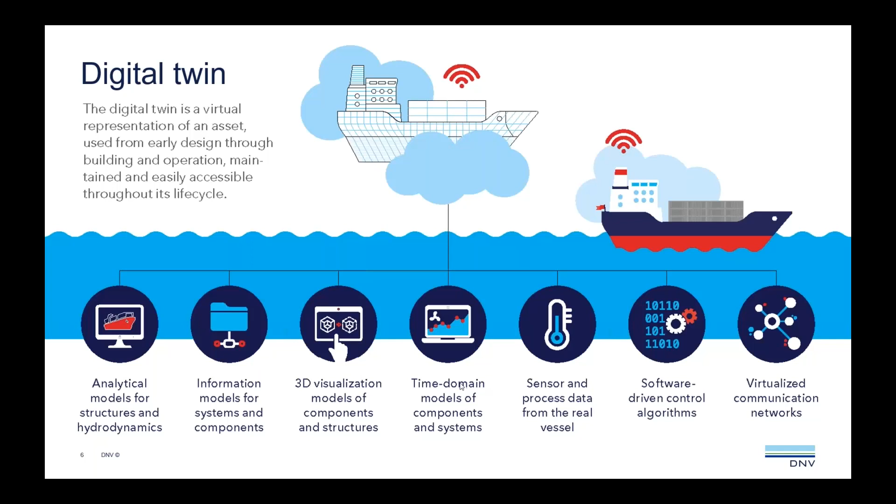So why do we do this? Typically, if you can work in a digital environment early on, there is very little risk because there is no risk of damaging hardware and components. You can do a lot of changes quickly and test them and find, for example, that your vessel is not suitable for a certain operation, etc. And if you want to do more testing in the real vessel, this is very expensive and also more risky, right? Because if you find something later in the project process, it can be very expensive. So, okay.

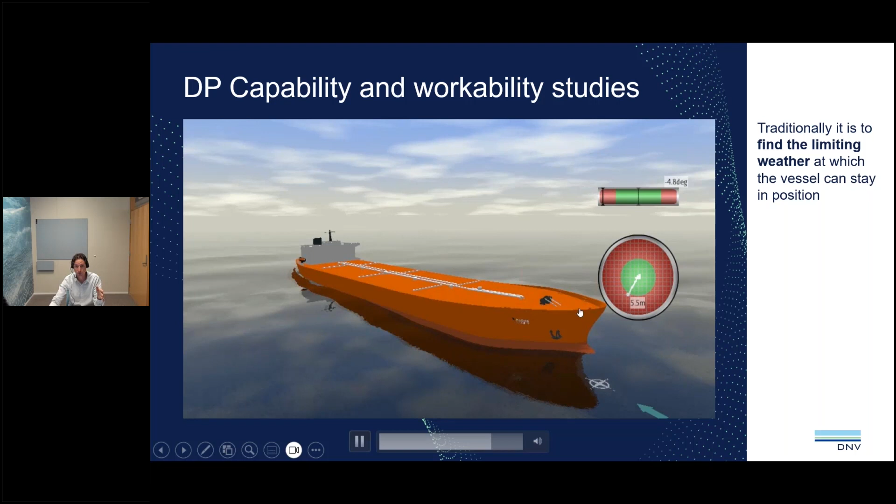Now we are increasing the weather. We see that the vessel is still able to maintain its position in about 5.5 meters, but the weather is increasing, and you see the vessel is slowly losing position, and the heading also is hard to control. So eventually the vessel will lose position, and in this case we would say this operating condition, this weather, is too harsh for this vessel to operate. This is one of the typical applications.

Lately we've been moving more into workability. For example, you see an example here. The idea is you want to assess if you're able to transfer people via motion compensated gangway from, for example, an SOV to a fixed oil platform or a wind turbine. And in these cases, we are looking not only into the limiting weather conditions, but for example, how many days, how many hours during the month you can transfer people from the SOV to the platform.

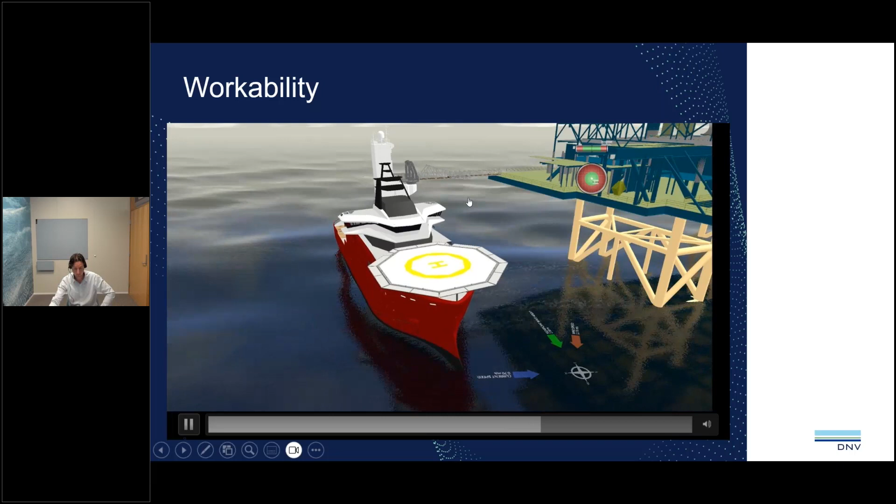There are different ways of running this type of analysis of workability and limiting weather conditions. The two main families of analysis are called static and dynamic simulations. In a static analysis, you get the weather forces: wind, current, and waves. We increase the wind, current, and waves, and in the static case, you fight back with the thrusters. And when you reach the point where you don't have any more thrust, you stop there, and that's your limit.

So in the static simulation or analysis, there is no vessel motion. It's just a pure balance between the forces, the environment against the thrusters. We know that in reality there will be dynamics, because the vessel will move, right? So we use something called dynamic allowance, a buffer to say we need to reserve some thrust for dynamics, or increase the dynamic forces in the analysis, to account for those dynamics which are there in reality but not accounted for in the static analysis.

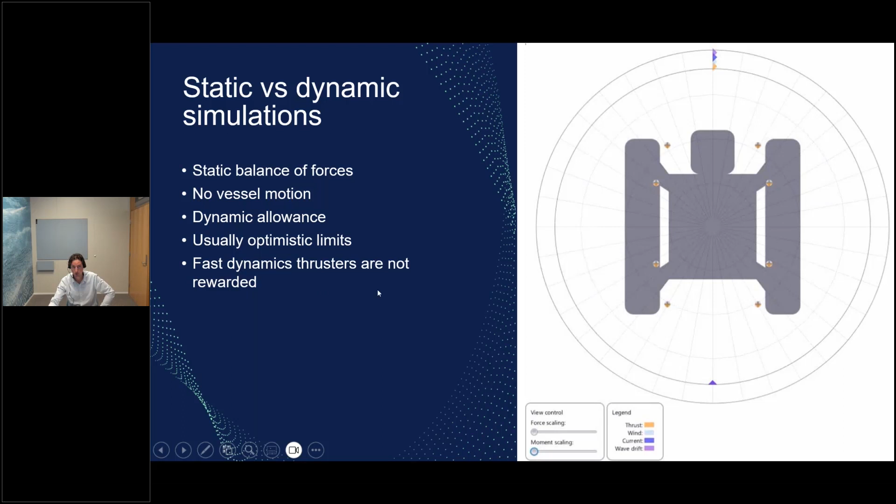Another important thing to point out is that if you have, for example, fast thrusters, you're able to deliver the power quicker than in another case. You're not really rewarded here because there are no moving parts. There is no dynamics of thrusters or generators. So you don't gain anything when you run the static analysis if you have faster thrusters, for example.

When you run dynamic simulation, the difference is that we are not really looking at balancing forces. We are mainly looking into the vessel position and trying to control it to what we call the set point, the place where you want to be. In this case, we consider the full vessel motion, both due to the first order waves and the dynamic positioning. And you get a bit more insight into the vessel performance, because you can also add, for example, the gangway motion, the crane motions, etc.

So the two main differences are that in the static case the vessel doesn't move, and in the dynamic analysis you can consider the full motion of the vessel.

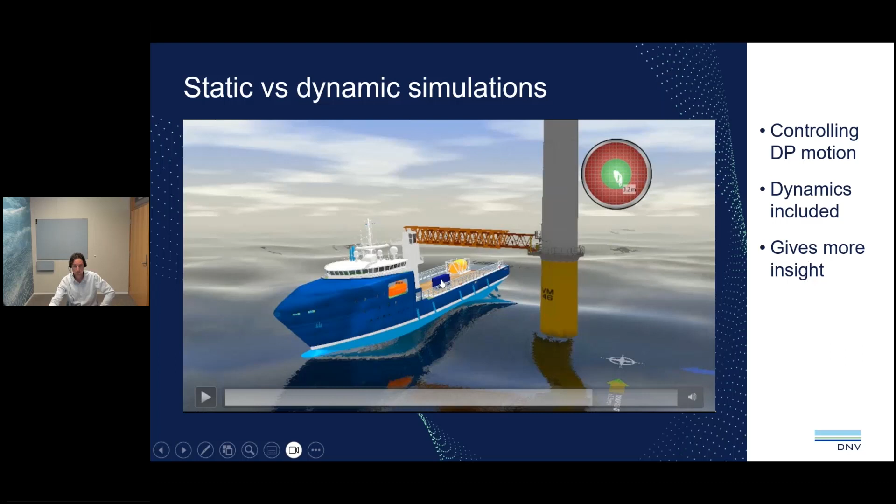When we run these simulations, we typically use our standard DNV ST-0111, which is the standard for assessing dynamic positioning capability. To make a long story short, the standard has different levels: 3 levels for static, level 1, level 2, and level 2 site, and 2 levels for dynamics, called level 3 and level 3 site. The slides will be distributed.

You can read the text later, but the main difference is that level 1 is a very simple method. It's mainly for monohull vessels, and it is prescriptive, meaning there are formulas for everything. So anyone that does a level 1 should get the same results, because it's just punching in the data, and the formulas and coefficients are the same for everyone. Then if you want to use your vessel specific data for the thrusters, the wave coefficients, etc., you can use level 2.

And then you can use level 2 site if you want to use site environmental conditions, because level 1 and level 2 use a Beaufort environment scale. So it's mainly for benchmarking. While if you want to run capability for the place where you're going to operate, then you do the level 2 site, which is the one that we use the most, together with the level 3 site.

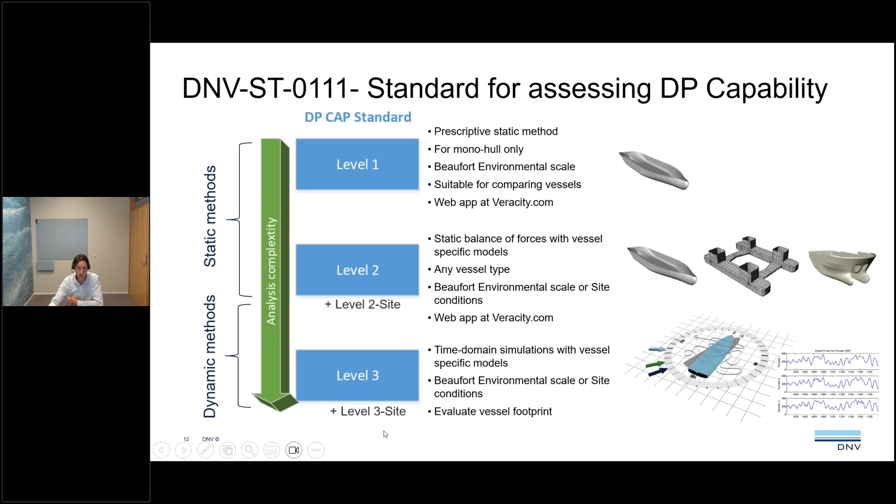If you want to look into dynamic simulations, where you look at the footprint, you look at the time series of power, how the power is distributed, etc., then you go to the level 3 and the level 3 site. Again, level 3 is mainly for benchmarking, while level 3 site is more for your site conditions, so your environmental conditions in the area where you want to work. And based on experience, level 2 site and level 3 site are the analyses that we run the most.

How is the standard used in industry? There are many energy companies that require the use of our standard for tenders and operational planning, among others, TotalEnergies, Equinor, Ørsted. It's also used in the shuttle tanker guideline in the North Sea. It's called NOROG 140, where our standard is required, and also the use of the web tool that we provide with the standards.

I will go back on this later, but the main idea here is that in the tool we have a share function where you can share the vessels between different actors, such that the vessel can be created as a design, a new build, and then can be transferred. So reuse of the vessel models through the vessel life cycle. So it can be transferred from the designer to the yards, to the owners, etc.

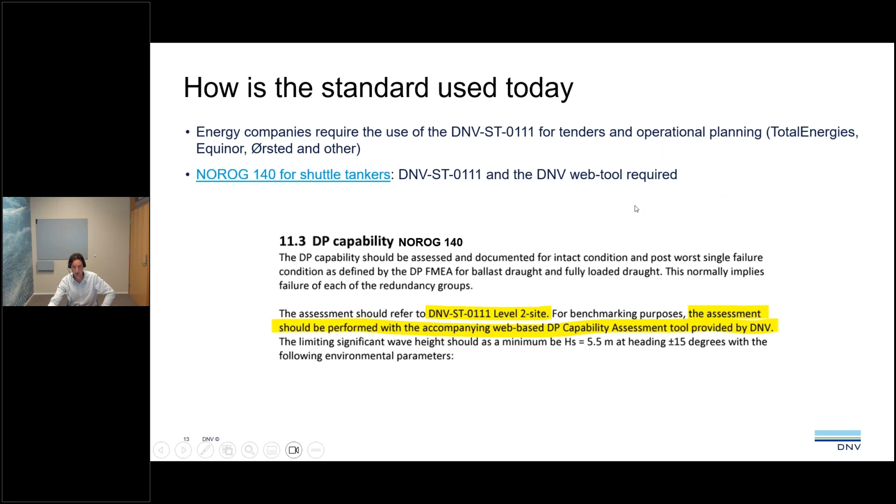So where do we use the digital twin? There are different areas where we do that. For design, for example, it's a lot about right sizing these days, right? 20 years ago, we were building a lot of platform supply vessels in the North Sea with giant engines. These days, it's more like finding the sweet spot, balancing performance and cost. So we work a lot on thruster layout, rating, power systems, configurations, redundancy design, etc., just to find the right vessel configuration.

It is used a lot in operational planning, so you can run simulations and find out what is the operational window, what is the limiting weather the vessel can operate in for different configurations. And of course, contingency is also part of it, and is very important. For example, if you have one generator out for maintenance, a thruster out for maintenance, if you lose part of your equipment, etc. Or we have had some cases where we did some simulation because, due to vibration, a tunnel thruster could only work up to 80% of its power, right? So there are cases like that where you have reduced power or reduced functionalities of your equipment, so you can run this and find what are the new limiting conditions for the operations.

And these are used typically as input to operational guidelines, like activity specific operational guidelines, or well specific operating guidelines for drilling. We've been using this for positioning strategy. For example, I have some examples later of how to optimally place the heading of your vessel towards the waves, towards the current. And sometimes we run what we call workability, operability, where you try to estimate, for example, how many days a month you can operate in different areas.

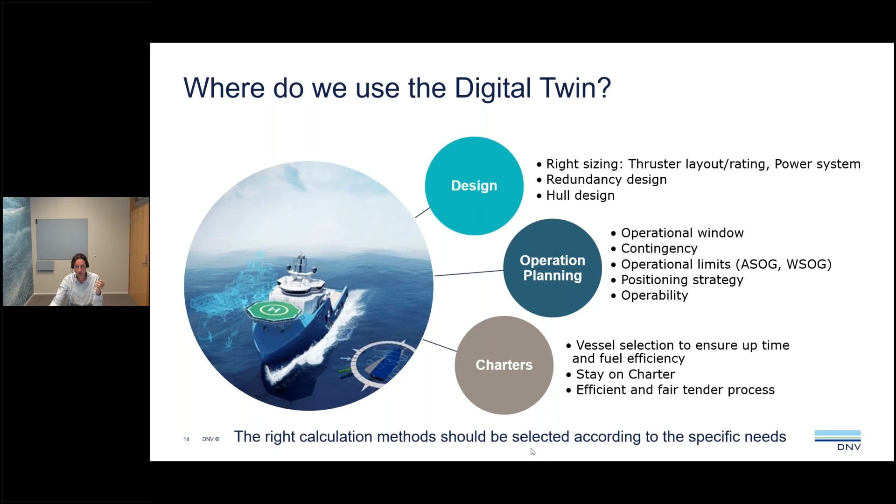So the benefit of using DNV and the digital twin and the DP capability study that we perform here is different. First, we can help operators and vessel owners to choose the right vessel. The idea is you want to have a certain uptime, right, or reduce the non-productive time. And as I mentioned before, you don't need to get the best vessel out there. You just get the right vessel. Maybe you get not the best, but some vessel that can work and maybe is cheaper to run, because we know that overpowered vessels are very expensive. But at the same time, if you don't pick the right vessel, you pick a vessel that doesn't have enough power, enough capability, then you end up waiting on weather, and that is also costly.

We help our customers reduce time for tenders by providing comparable bids using the standards and our tools. We can help the operators choose the right configuration, see what the different configurations and power configurations give in terms of fuel consumption and emissions to reduce operating cost. We help vessel owners select the right vessel and check if they fulfill contract requirements. And then we work a lot on operational planning to understand the limiting conditions to reduce the risk of incidents and accidents. And of course, we are a third-party organization, so we don't have any interest in different things. So we provide our third-party judgment on this.

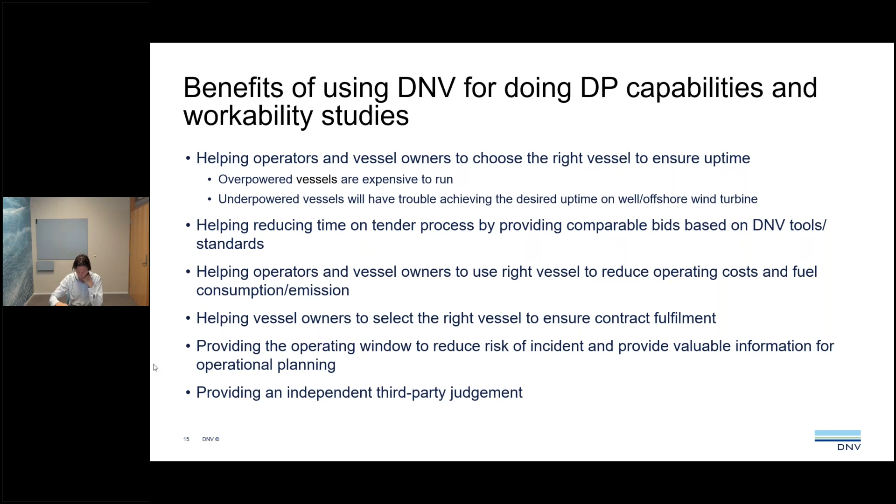Thanks, Luca. So now we're calling on you to offer your insights into what you're thinking about the digital twin technology. So we're asking what you consider the biggest benefit of a digital twin. So if you can click on one of the options there: if it's best as a tool for right-sizing vessel design, a tool for selecting the right vessel for different operations, best for giving insight into vessels' operating limits in terms of the weather conditions, or to support environmental sustainability. So you can click directly there into the poll. We'll give you about a minute or so to click, and then we'll have a look at the results.

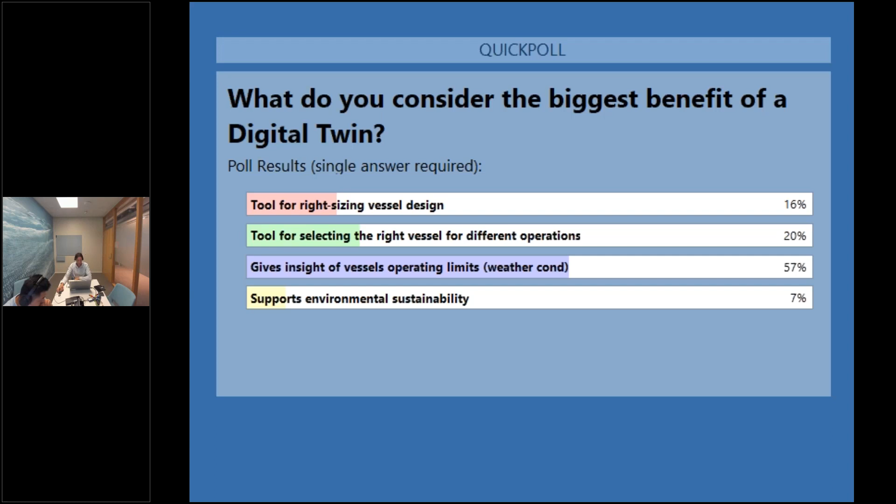Okay, thank you. All right, let me go back to the presentation. So one of the cases that I would like to present here is walk to work and the application of transferring people via a motion compensated gangway. The idea here is that we want to try to maximize workability, right? So we want to be able to transfer people when you have to and when you need it. The simulation that we run is for predicting if you can send people on the gangway.

And the way we do it, we model the vessel, we model the gangway with gangway-specific limits, and we can run simulation on different sites using also, as I mentioned before, the activity-specific operating guideline.

In this project here on the right-hand side, the idea was to replace the helicopter ride with a fast crew vessel. So here you see one of the Damen vessels, 7011, which is very fast. It's fantastic speed, so it's possible to replace the helicopter ride. But when you look into transferring people, then you need to, of course, run simulation to see what is the limit in weather where you can put people on the gangway.

You see the gangway on the stern is also designed particularly for this vessel, motion compensated. So you need to consider both aspects, right? The speed aspect is good when it comes to replacing helicopters, but you need to make sure that you're able to transfer people on the platform when you need it.

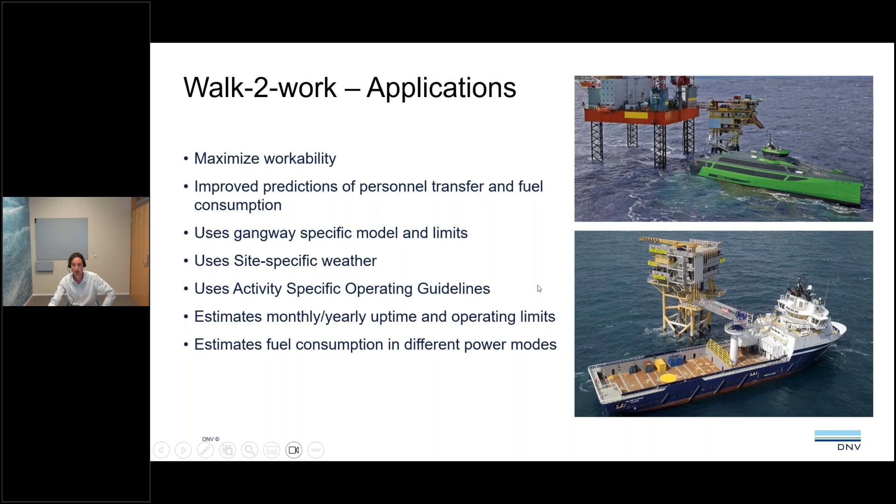We've been working quite extensively in offshore wind as well. The goal is the same. You want to see when you're able to transfer people to offshore turbines for maintenance, and same as for the oil and gas application, it's important that you look at this as a whole system, because, for example, the gangway vendors say our gangway can work up to 4.5 meter Hs, which is correct, but it depends which vessel you put it on.

If you put it on a vessel which moves a lot, then it's not the gangway that will be limiting. The vessel will move too much, and then in turn it will exceed the gangway limits, right? So as mentioned earlier, we look at the full vessel motion, both the dynamic positioning motion and also the first order motion in waves. You see this vessel is pitching a lot. So if you had the gangway on the stern here, you get a lot of steepness, so it will be too steep for the workers to walk on.

It's important that you use gangway-specific models with the limits. And another thing which is very important is that you should not use only the gangway mechanical limits, but you need to use the human factor limits, which are typically set by the energy companies when it comes to steepness rate. The velocity of the telescope also is important, because typically a gangway can do a lot more speed than is allowed to transfer people. And you need to do analysis which is site-specific, for the right site where the vessel will work.

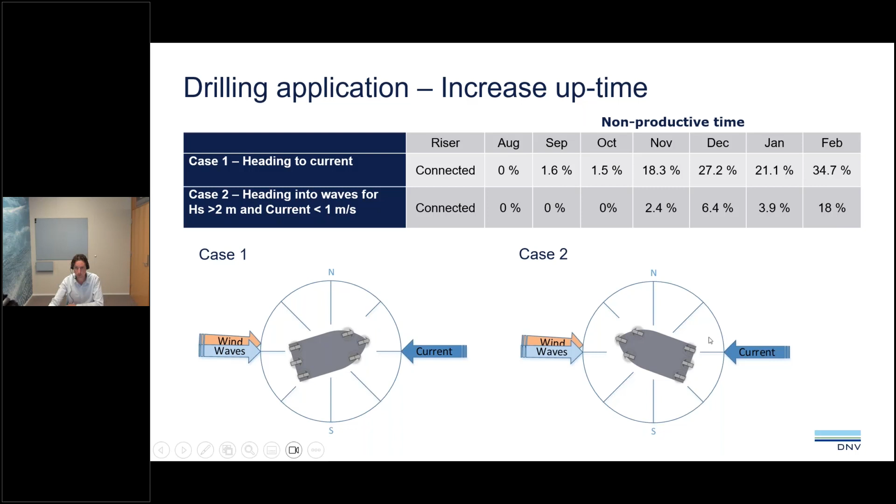So for strong current, of course, it's more efficient to put it towards the current. But when you have large wind and waves, you want to reduce the motion, and then you want to face the weather with the bow, right? And then you need to find where is the sweet point, switching between current and wind directions, right? So this is what we've done, to find out when you should move the vessel from heading to current to heading to wind and waves.

So this is one of the cases where you get a bit more than 4 meter waves and 2 knots of current coming from different directions, and you see that the footprints, so the maximum excursions, are quite good. You will never get the same footprint, right? Because the waves that are recorded at sea, you're not able to reproduce in the simulator, you can only reproduce the statistical data. So we can put the same significant wave height of 4.2 meters, but you will never get the same pattern. But what we're looking at is the maximum motion, the mean motion, and the standard deviations.

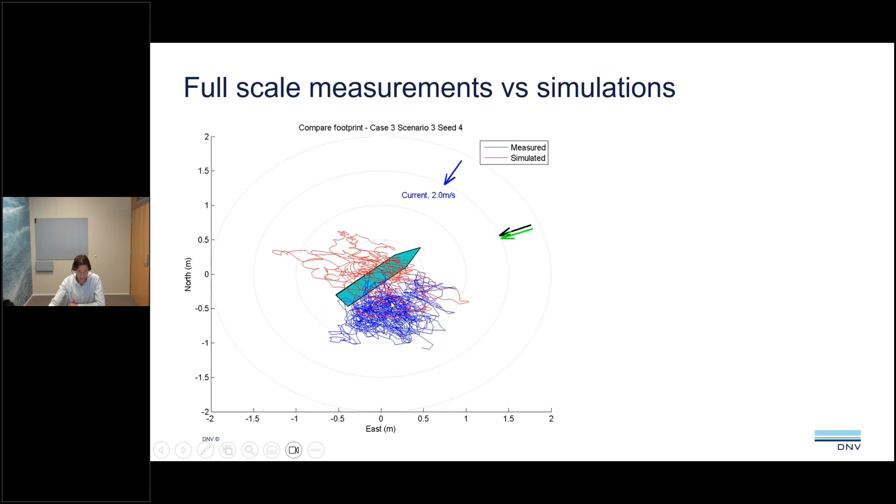This is another case. This was again quite a strong current from the side, and you see in blue the measurement, in red the simulations. They are not on top of each other because the simulation started at 0, but in the measurement the vessel was a bit off the set point, but you see that the pattern is quite similar. This is another case where you see the size of the cloud is similar, although it's not on top of each other because we didn't start from the same positions.

Also, we run simulations where you have mooring lines helping the thruster system to stay in position. This is called POSMOOR or thruster assisted mooring. This is typically done when you drill in somewhat shallow water, so below 500 meters typically, where it's convenient to have the lines help you. You can also save fuel by using the mooring lines.

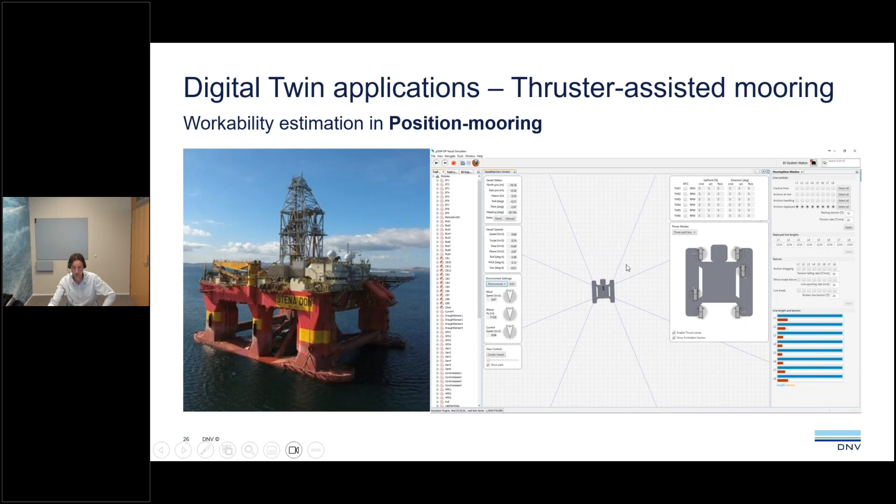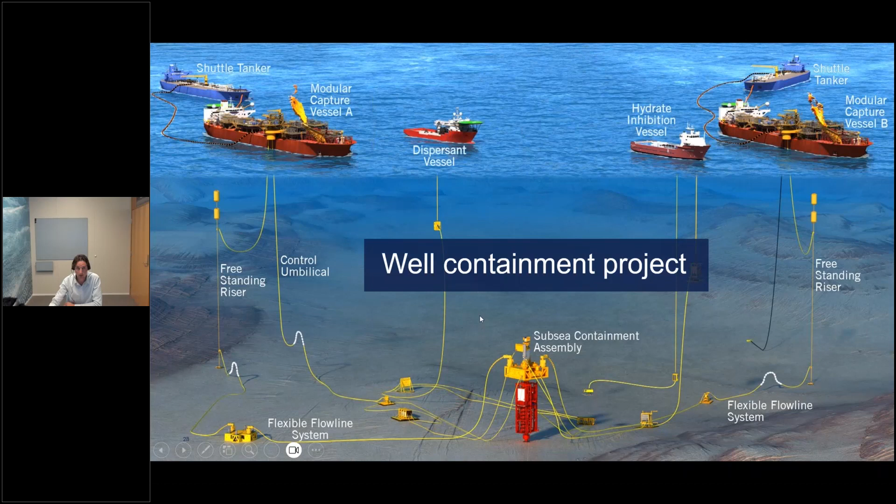One of the interesting projects we had is what is called the well containment project, which is a project we ran with a consortium in the US, which was created after the Macondo incident. The idea is that if you have a leakage in the well, you would go on top with a drill ship, with a suction cone or cap, and then the drill ship can suck the oil, right? But it doesn't have storage capacity, so it can send the oil through the hose to a tanker.

But the idea is that the tanker has no dynamic positioning capability, so the tanker will be switched off and it will be connected with a hawser, a cable, to the drill ship. So the drill ship has to withstand the weather, but also keep the tanker in position, which is also helped by a tug. So we did all the simulations to understand how much weather can you take, if the weather changed direction, how are we able to change the direction of the oil convoy, how much time it takes, etc. And how strong should the tug be to keep all the convoy in position. So this was a very interesting project.

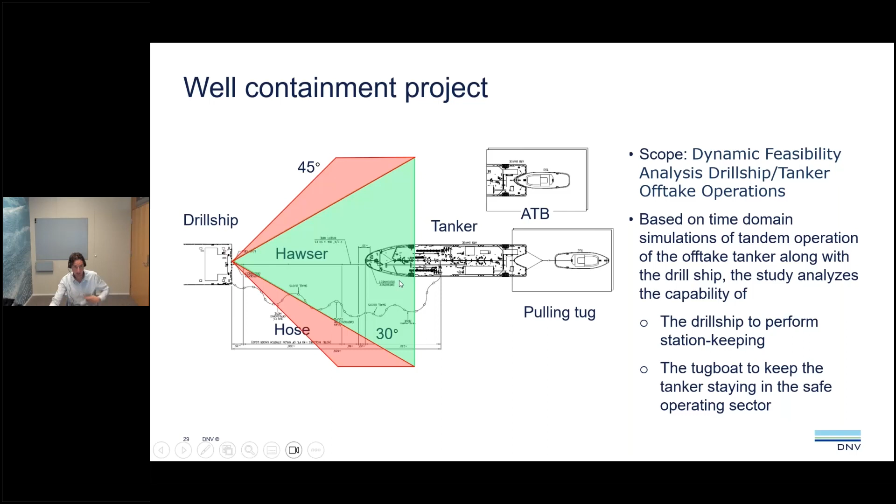Okay, now we'll dive a couple of minutes into the update you're going to have. We are working on the new update. It should be coming up around November. So one of the main updates is to update the standard with the new and latest technology developments, like permanent magnet thrusters, water jets, how to include, for example, fast response thrusters, etc. We will update some of the thruster models to include the energy efficiency they have.

We will add workability guidance for the studies and different criteria that we use for operability, for example, for walk-to-work and drilling, etc. We will have a new definition of thrust utilization, what we call effective thrust utilization, which gives you a taste of how far you are from your limit. If you set the fixed weather, you want to know where you are in your system, because you're at 30%, 50%, 70%, etc. There will also be better guidance for running time domain and dynamic simulations.

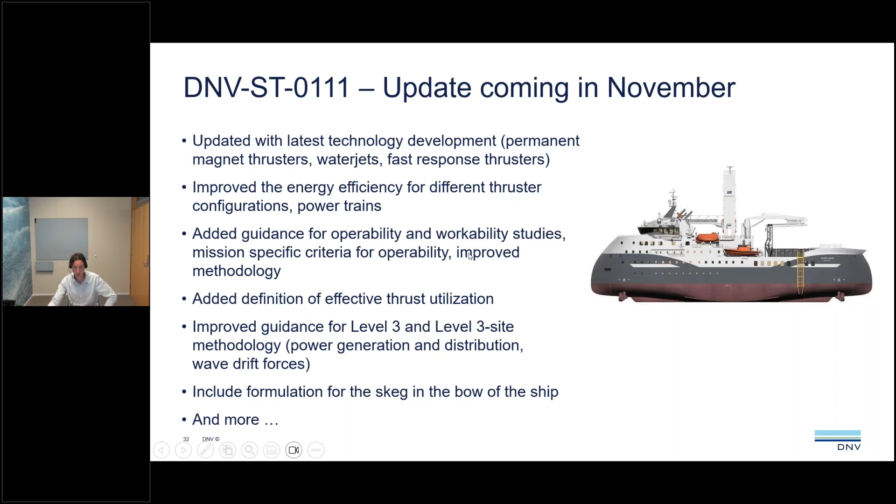And also based on the new design of SOVs, you see this vessel here has two skegs, one in the stern, one in the bow. At the moment, the standard only includes the skeg on the stern, and now we will also have the possibility to have the skeg in the bow, and we have some other stuff. So if you have questions about this, you can reach me, and I will answer you. Also, if you have input to the standard, you're very welcome to send it to us.

We've also been working together with the IMCA work group. I've been part of the DP work group for the new DP capability plot specification, which will come up for hearing soon. A lot of good work has been done there by the group. A lot of changes from the previous version, where we will have both dynamic and static analysis included, and a lot of new things regarding definition, framework, guidance, and reporting. So this will be ready for hearing soon, after the end of June.

I would like to spend a couple of minutes on the tools that we have. Most of you know that we have a web tool for running DP capability analysis for level 1, 2, and 2 site. Let me see if I'm able to share something with you. Give me a second, it's coming now. This one here, yeah.

So this is our platform where you can have different vessels. I just want to highlight what is new, what is coming now. As I mentioned earlier, the platform will allow you to share vessels. So you can share vessels among your team, and also with your partners, your customers, etc. You can lock the vessel so that you share it read only. But the main point is that you have only one vessel, one source of data. So if you work in a company with multiple people working on a fleet, then it's the same fleet for everyone. So there is no version lying around.

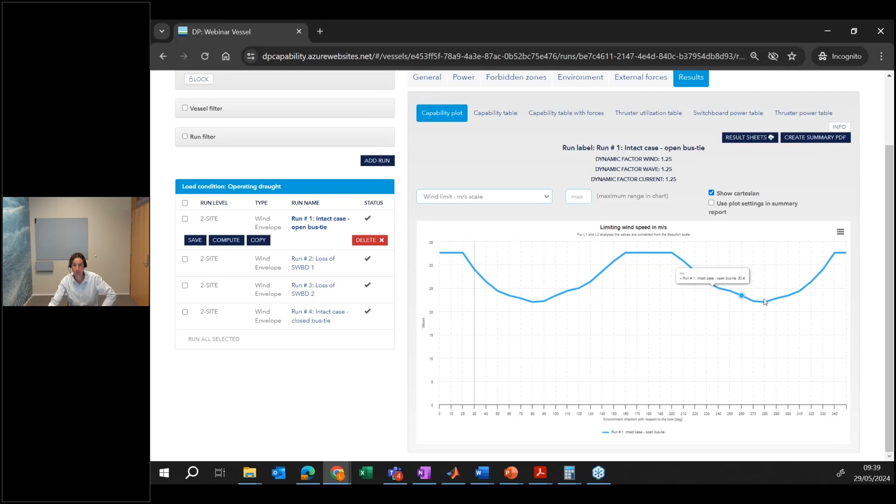The IMCA will also be here when the new IMCA standard is out, and today you can also show the plot in different formats based on your wish and so on. At the moment we have about 3,000 users. They're growing and we get good feedback. So if you have any feedback or input to improvements, please send us your inputs.

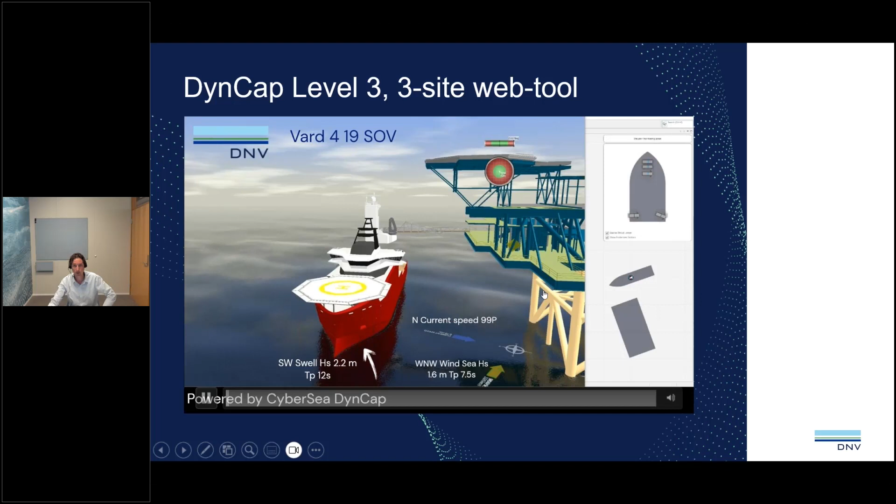Also, we have a level 3 tool, which is quite similar to the one I showed you now. We have a web app there as well, where you can control your simulations, and you get the results from the time domain instead of from the static analysis. You can do the same. You can do reporting. The only thing is, in this web app the models are more complex for the moment. DNV makes the models, and then we make the models available for the customer. They can run simulations with different conditions and get reporting as well.

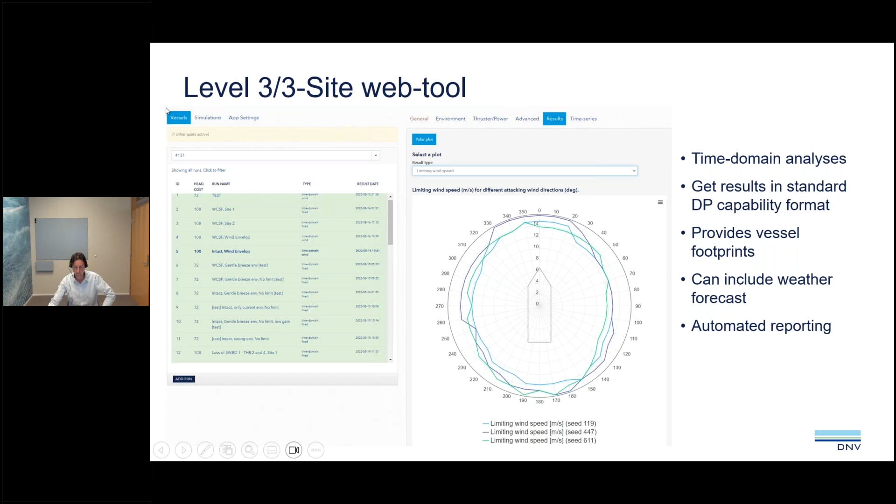Okay, I will jump into the last part of the presentation, which is about low-speed maneuvering applications. We did some projects where we want to estimate, if you have a vessel coming into port, how many tugs are needed for getting into position, the size of the tugs, the speed the vessel will be moving in, what is the limiting condition, for example for an existing series of tugs, and how the tug configuration could work for getting the vessel into position.

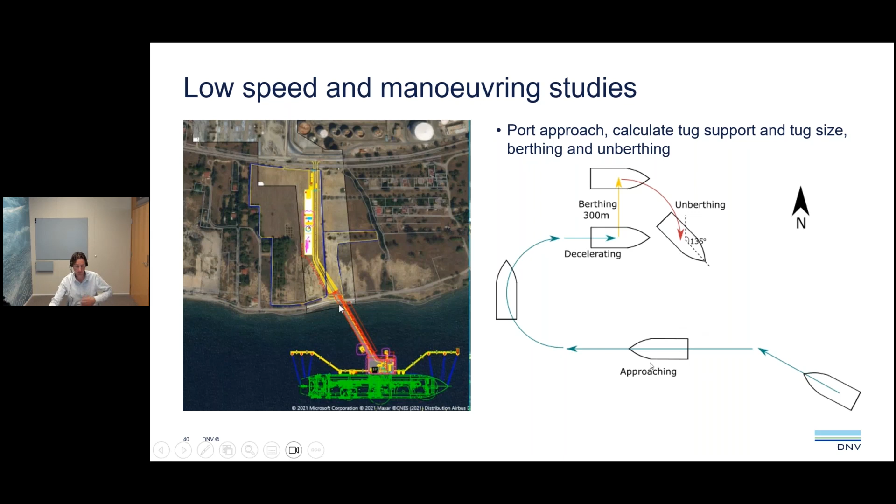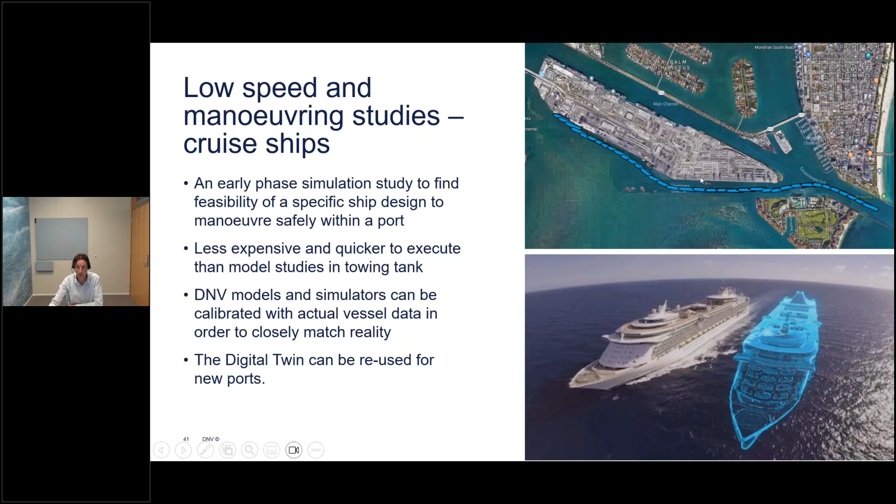So this is also something we can do, and it's similar to what we can do for cruise ships, where we estimate if you can get into ports and do maneuvering around the ports in different conditions, and especially you could run simulations on new ports that are not even built, right? To see what will be the performance of the cruise ship coming into the new port.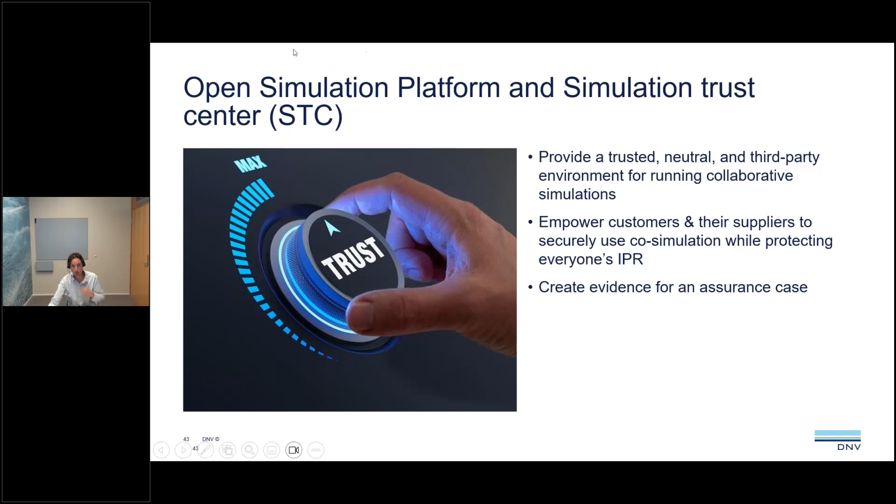So to conclude, about the work we've been doing with the OSP, the Open Simulation Platform, and the STC, which is the Simulation Trust Center. The Simulation Trust Center is an interface or a platform on top of the Open Simulation Platform, which is an open source co-simulation platform. The idea is that you want to be able to co-simulate, which means simulations coming from different vendors. For example, you have a thruster vendor which creates a model and makes it available to the platform. You have maybe an engine manufacturer which makes his own model.

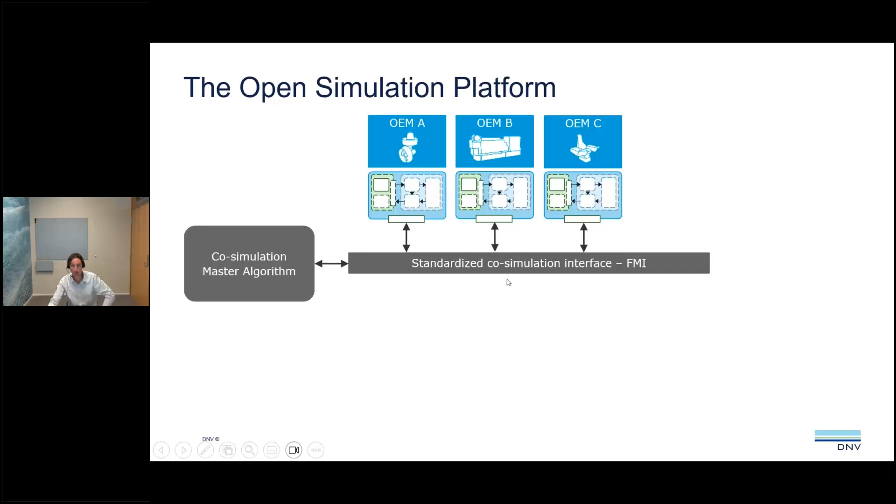And the important thing about the STC is that they ensure that the IPR, everything behind the model, is not shared between different actors, right? Because vendor A doesn't want to show what's inside the model. So the model is shown as a black box, but is available for simulating. And you don't need to move people or models to different parts of the world. You can simulate online in the cloud, where people connect their models, and run simulations organized and synchronized by the STC on top, and find the vessel performance in different conditions.

And this is what we are doing in the project with Damen for the CSOV 9020. They're using the STC to create a digital twin and simulate this vessel in different conditions. And the idea again is to see if you're able to transfer people via the motion compensated gangway.

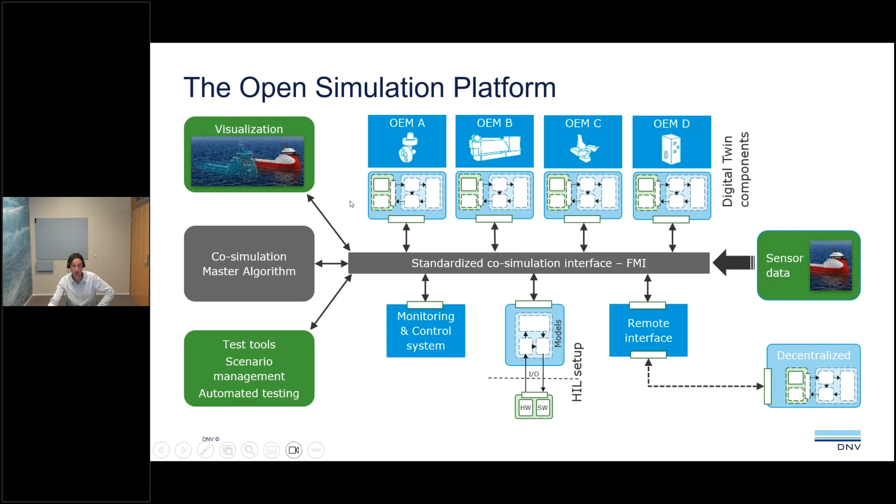And here different partners and different vendors are delivering different models, right? We've been tasked to deliver the hydrodynamics model, but the other part of the model comes from the actual vendors. So you can connect everything as shown here, right? In the STC, and then you can run simulations, and then you can run performance on different weather conditions and see if the vessel is able to perform as intended.

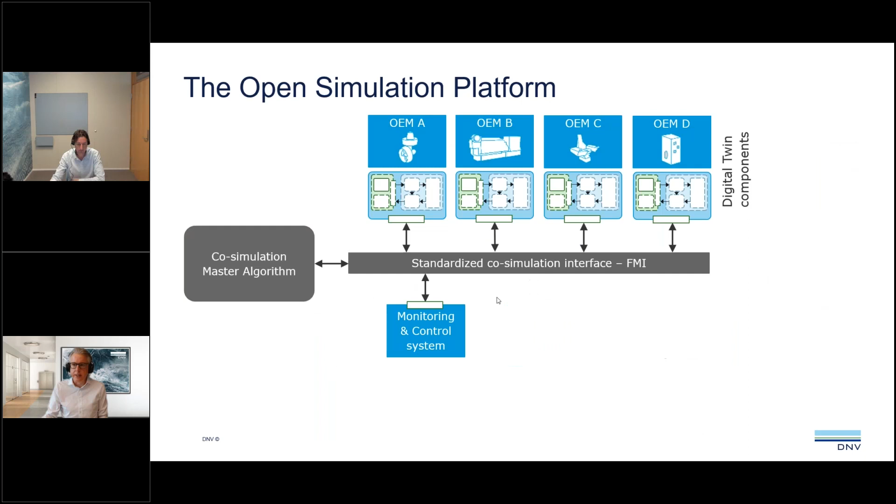Let's start off. We have a lot of detailed questions from everybody around the data that goes into a digital twin. We've got some questions there on what kinds of input data are necessary for the simulation. Does 3D scan data help to create the model? And specifically in drilling, do we need full metocean data, wave current patterns and things like that? So we've got quite a few questions about the types of data and specific data that's used in the models.

Okay, thanks. So the type of data is of course depending on the application, right? When it comes to drilling, we are looking at motion limitations, motion in waves, current and wind. So obviously you need the hydrodynamic properties of the vessel. So load condition, we use the 3D model of the hull to calculate the wave forces and the wave coefficients. We use wind coefficient and current coefficient, which typically come from either CFD or from model tests to build up the forces.

We need to know the dynamics of the equipment that is used for dynamic positioning, but in this case it's enough with the thrusters. So the power rate with the thruster, how fast they rotate, for example, how fast the propeller will go from 0 to 100%. In the case of the drilling, we use also the riser stack. So which elements are in the stack and their diameter and their resistance, the resistance coefficient for each section, to calculate the forces.

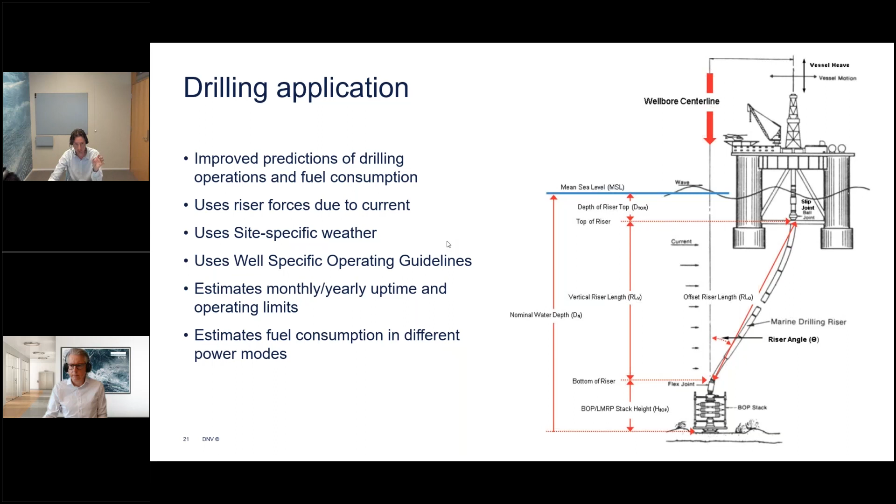We did some full scale trials to, let's say, calibrate and compare the performance of the digital twin with the actual data. One is the one I've shown here on the Maersk Venturer, on the V class, where we got a good agreement. I have to say that here in South Africa, they measure the current with a Doppler velocimeter. They measure the waves, so we got the full stack of measurement.

We did also some full-scale validation on a platform supply vessel in the North Sea, where we get a bit less precise weather data, but we were looking at the footprint and basically getting feedback from the DPO. Okay, what feeling about how far from their limits they are, and compare this with what the plot was saying, and that was also quite good in agreement.

So we are working now in a project where we are going to do this for SOVs, for transferring people via the gangway. So we've done some work there, and as I said, you can start with the first version of the digital twin, but then it's important that you're able to calibrate it with the actual data.

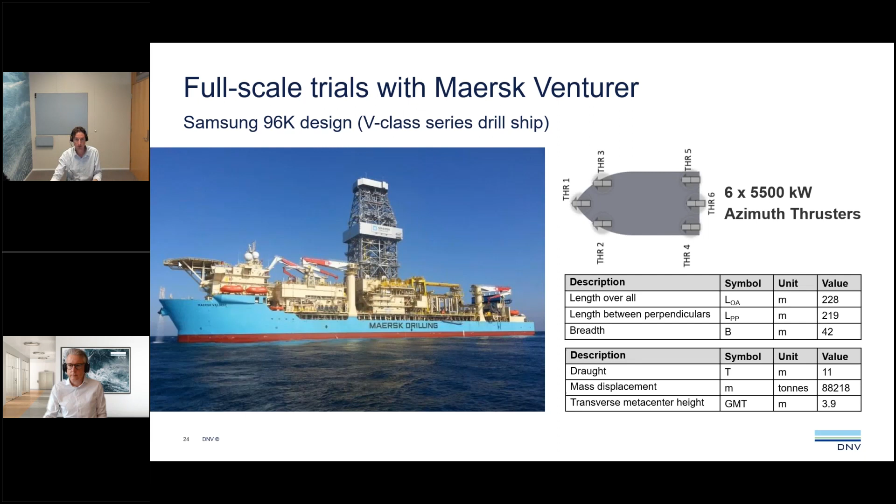So the mechanical limits, for example, if you have a gangway, it can go plus minus 5 meters in displacement. Displacement is, let me go back to here. Displacement of the telescope is the maximum sort of excursion the telescope can have. Let's say plus minus 5 meters. That's mechanical, but in practice, for transferring people, you might go up to 3.8 meters, not all the 5, right? So that's one limit.

The speed as well. The speed of the telescope is another limit. It's very important. Typically, it is around 1.2 meters per second, somewhere around there, 1.2, 1.3. The gangways typically can do 3 meters per second mechanically, right? But you don't put people on when they do 3 meters per second. So you need to add those limits.

Same with the steepness, right? The steepness is what a worker will feel when walking on the gangway. In some places you can use 10 degrees because of regulation. Australia, for example, even if your gangway angle can reach 20 degrees, you will never be able to use that because the regulation says 10 is the maximum. Some other places it is 12 degrees, some other places it is 14 degrees. And those are also factors due to regulation.

And then there is the steepness velocity, so the rate at which the steepness will change. 3 degrees per second, for example, although the gangway maybe can do 6 degrees per second, right? So you need to use the human factor in there. Accelerations also are a factor. Vertical accelerations and horizontal accelerations are also used in those analyses. So these are the typical limits that we use.

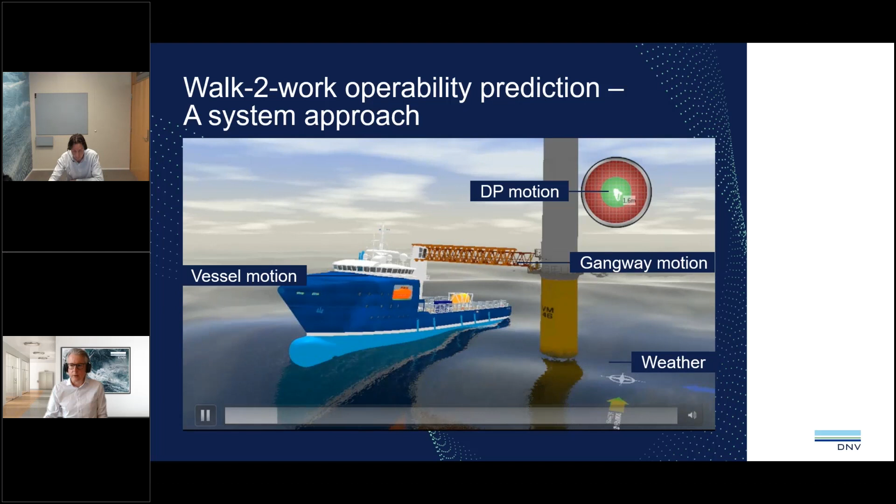Another couple of specific questions there. Whether the simulation can take roll reduction equipment into consideration. Sorry, Adam, can you say it one more time? Whether the simulation can take roll reduction. Oh yeah. This is very important when you run this type of simulation. So we modeled the effect of the roll reduction tanks, for example, or devices in the roll motion.

And this can be done in two ways. Either there is software that can help us to tell how the resonance will move and how the peak of the resonance will be shaped, or we've also been using in some cases model tests to calibrate the digital twin performance for the roll part. Yes, it's very important to use them. Yep.

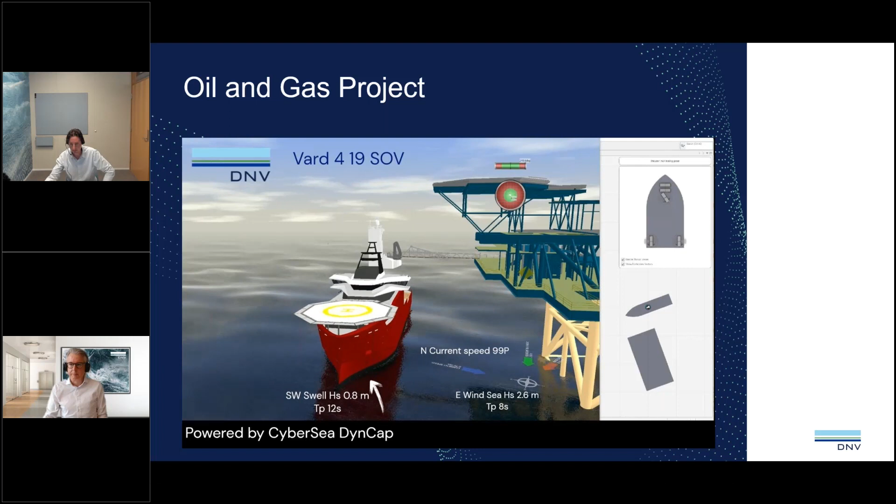And the main differences between the DNV and IMCA guidelines for DP. Oh, this is a spoiler because the IMCA is not yet released, but let's say the DNV was the first sort of standard that included also the dynamic part, right? Now IMCA also is including that, and IMCA is looking more into what as a minimum you should have: this effect, for example, thrust losses, this loss, this coefficient, all these particularities in the methodology.

And then for each of these elements, IMCA will say, okay, you can use either the DNV standard for this, you can use the ABS standards, you can use API, you can use the old IMCA. So it's more like setting requirements on what you should include in your simulation and how you actually do it. You can read from different standards, because the goal of IMCA is not to write a new Bible or standard with calculations and methodology, but to write a framework on how to run analysis and where you can find the sources for including the different effects that are required.

Thanks, Luca. So maybe to wrap up, we had a few questions around the future of the tool, how we're working to improve simulations with the twin, if we're using any machine learning systems, and how we expect these digital twins to develop in the future, especially as it relates to the DP capability. That's a very good question.